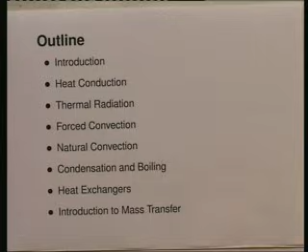And then finally, we will go to the topic of mass transfer and introduce its elements. Now you may ask, why is mass transfer taught alongside heat transfer, when really we are covering heat transfer through most of these lectures? The answer is this: the process of mass transfer has many similarities with the process of heat transfer.

Heat transfer occurs when there is a temperature difference, mass transfer occurs when there is a concentration difference. The equations describing these are very similar or analogous, and therefore when we derive a relation for a particular heat transfer situation, it is often true that relation, with some modification, is also valid for a corresponding analogous mass transfer situation. So the purpose of introducing you to mass transfer is to point out this similarity, so you can use heat transfer relations for studying certain types of mass transfer problems.

As far as books for this subject are concerned, there are a variety of books written and available to cover the syllabus. The two books I am putting in front of you: the first is one which I have written, a textbook on heat transfer, 4th edition, published by Universities Press.

This is a book which we will be following to a large extent, but not all of it, because it goes much beyond the syllabus normally prescribed in the undergraduate curriculum. The other book we will also be referring to is by Incropera and DeWitt, on fundamentals of heat and mass transfer. It is widely used in India and the US, has been used for the last 20 years, and is an excellent book with a lot of practice oriented problems.

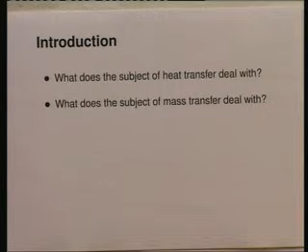Now, let us begin with the introduction. The first thing we ask ourselves is, what does the subject of heat transfer deal with? What is it all about? Why is it important? And then we ask the same question for ourselves about mass transfer. What does the subject of mass transfer deal with? What is it all about? Why is it important? So, let us take up heat transfer first.

Now, first of all, when does heat transfer occur? Whenever there are temperature differences in a body, we know from experience that these temperature differences are reduced in magnitude over time by heat flowing from regions of high temperature to regions of low temperature. The body may be in the solid state, liquid, or gaseous state - it does not matter which. The point is, when there are temperature differences, heat flows from the region of high temperature to the region of low temperature.

The subject dealing with the rate at which this heat flow occurs - I emphasize again, rate - the subject dealing with the rate at which the heat flow process occurs is called heat transfer.

Now, it is important straight away to distinguish the subject of heat transfer from the subject of thermodynamics, which all of you must have studied a little earlier. You must have studied the first law, the second law, certain power cycles and so on. In thermodynamics, normally when we have a system in a certain state and that system undergoes certain heat and work interactions, because of those interactions, the system goes from one equilibrium state to another equilibrium state, attaining a certain state described by temperature, pressure, etc.

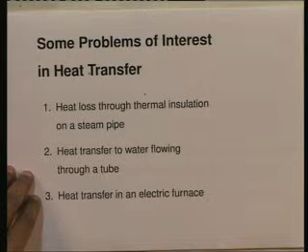I am going to look at three problems. First, I am going to look at a problem of heat loss through thermal insulation on a steam pipe. Then I am going to look at the problem of heat transfer to water flowing through a tube, and then I am going to look at heat transfer in an electric furnace. These are three problems of interest in heat transfer, and we will look at them one by one.

The first one: heat loss through thermal insulation on a steam pipe. Steam is widely used in manufacturing process industries, as you all know. Suppose I have a big plant with a lot of workshops and sheds all over, and steam is needed in each of those sheds. Typically, one may have a central facility where a steam generator is located, steam is generated, and there will be pipelines which carry that steam to the various sheds. Even within the shed, there will be long pipelines along the walls which carry the steam along the length or breadth of that shed, so that it can be delivered at a particular point where it is required.

Now, we have gone to a lot of trouble to generate that steam in a steam generator. We will have burnt oil or something like that, given heat to water and raised that steam at the pressure required. So here in this example, we are talking of steam at 5 bar and 170 centigrade, superheated steam at this condition, and we are passing it through a pipe. Having gone to all the trouble to generate that steam, obviously we do not want that steam to condense or lose heat. So we put insulation around it. Insulation may be in the form of some fibrous insulation like mineral wool, glass wool, etc., which is put round.

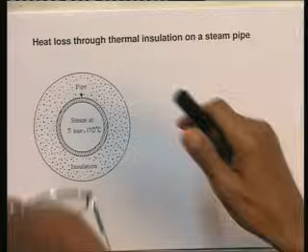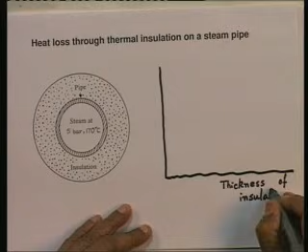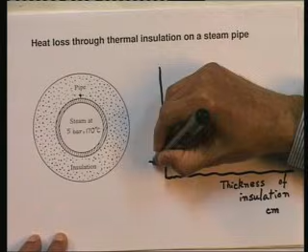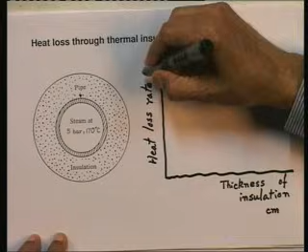Let us draw a graph. On the x axis I have the thickness of insulation which is put around the pipe, let us say in centimeters, and on the y axis I have the heat loss rate, in watts per meter, that is heat loss rate per unit length of the pipe.

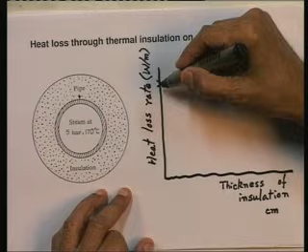Let us say when I have no thickness of insulation on this pipe, the amount of heat being lost is as indicated by the cross here. Obviously, if I put insulation on this pipe, the heat loss rate is going to decrease. Typically I will get a graph something like this, as more and more insulation is put, the heat loss rate in watts per meter will go on decreasing.

Now the problem before the heat transfer engineer, who is to design this and decide what thickness to put, is the following. He is told, restrict the heat loss rate to a particular value, as I am marking here. So find the thickness of insulation to restrict the heat loss rate to the value specified, in which case, having done this calculation and got this graph for a particular insulation that he is using, he will go horizontally, then go vertically and say this is the thickness of insulation needed.

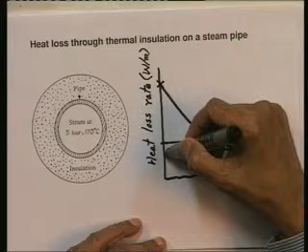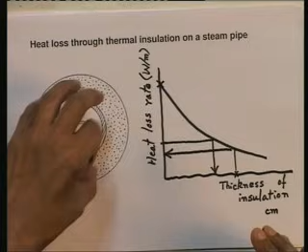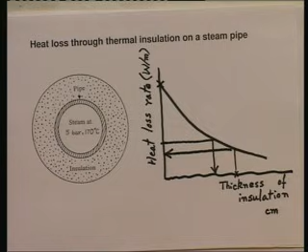Or the problem may be in reverse. He will be told we are going to put 3 centimeters or 5 centimeters thickness of insulation. What will be the heat loss rate as a consequence? In which case, given a certain thickness, he will go up, then draw a horizontal line and say this is the heat loss rate. And therefore, from this point, which is the heat loss rate without insulation, to the heat loss rate because of the insulation, this is the amount of reduction in the heat loss rate. So, because of his knowledge of heat transfer and heat conduction occurring in the insulation, the heat transfer engineer will be able to either decide on the thickness of insulation to put or find the heat loss rate for a given thickness of insulation. This is a typical problem for calculation which we encounter.

Now, let us go to the next problem that I mentioned, that is heat transfer to water flowing through a tube. Here is a tube. The diameter I have given is 2.5 centimeters for this tube. Water is entering it at 30 degrees centigrade. On the outside of this tube, we have low pressure steam at 50 degrees centigrade condensing on the outside of this tube. So obviously heat is going to flow from the outside to the inside, and this water which is flowing through the tube is going to get heated up and go on increasing in temperature as it moves along the length of the tube.

Now, where does this situation occur? This is a situation which will typically occur in a steam condenser. You have a power plant, say. In a power plant, from the turbine exit, you have low pressure steam. You need to condense that steam with the help of cooling water and then raise the pressure of that condensed water, then put it back into the steam generator.

That is the Rankine power cycle. So this tube which I am showing you would actually not be by itself, but would be one tube in a large bundle of tubes on which steam would be condensing. I am showing one as an example. So let us come back to the single tube.

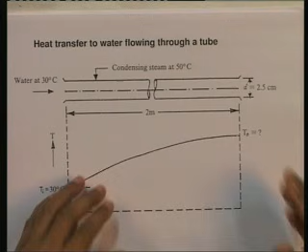So the heat transfer engineer designing for this situation will typically have to tell what would be the length of the tube for a given exit temperature, or the reverse problem: given a length, what would be the exit temperature. Now let us go on to the third problem which I mentioned.

The third problem is heat transfer in an electric furnace. Here we have steel strip which has been rolled in a steel mill, undergoing a heat treatment process. Typically a steel strip would be a few millimeters in thickness, maybe a millimeter thick and a few centimeters wide. It has been rolled by some rolling process and formed into a bundle after that.

During the rolling process, because of the deformation that has taken place, the steel loses certain desirable properties like ductility, malleability, etc. We want it to regain these properties, and typically for that one does some kind of annealing heat treatment process. This consists of heating the steel strip up to a specified temperature, just above that, and then allowing it to cool down slowly. So the job of this furnace is to heat the steel strip up to the temperature required for that heat treatment process to occur, usually around 600-700 centigrade.

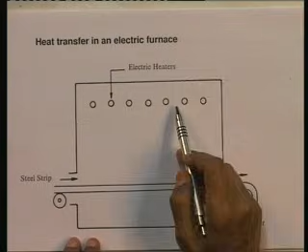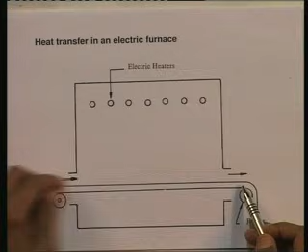So the problem before the heat transfer engineer would be the following: he is told, here is an electric furnace, the temperature in this furnace is say 1200 degrees centigrade or 1000 degrees centigrade. It is required that the temperature of the steel strip at the exit be 720 centigrade or some temperature like that. The steel strip is entering at room temperature, 30 degrees centigrade, and moving with a certain specified velocity. What should be the length of this furnace to get the desired exit temperature?

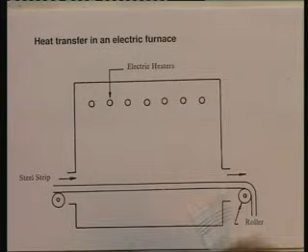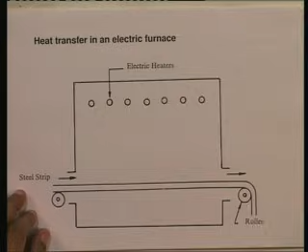Or the reverse problem: given a certain length, what should be the velocity with which the steel strip should move so that the required exit temperature is attained? That exit temperature must be just above the annealing temperature for that particular steel, so that when it goes out it is just above that temperature, then cools down slowly, and during that slow cooling process, it acquires the desirable mechanical properties we are looking for. So this is a typical heat transfer problem an engineer would face.

Now I could go on giving you examples, but I think you get the idea. Let me show you one more example of a problem of current interest. We are in a situation nowadays where electronic circuits, electronics, plays a key part in our lives, and miniaturization in electronics is the key word today. VLSI for instance, or VVLSI, whatever it is. We go on making thousands and hundreds of thousands of transistors over very small areas, compared to the old days when 100 transistors might occupy a whole tabletop.

Now, transistors generate heat, remember that, and it is a requirement that if the transistor is to operate well, its internal temperature must not exceed some safe value. In fact, there are two temperatures. One temperature is a temperature which, if exceeded, will completely stop the transistor from functioning. That should obviously never be attained.

It is known that if a component works at high temperatures, its life, the period for which it will work consistently, reduces. If the design specification requires the transistor to work for a few thousand hours, it will be specified that the surface temperature should never exceed a particular value, typically 50 or 55 centigrade.

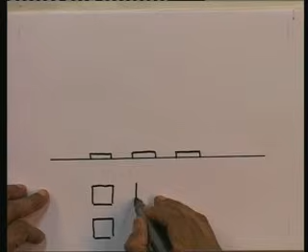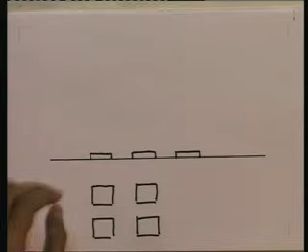Let me draw a situation. This is a board on which we have a number of electronic chips. Let me draw a few as an example: 1, 2, and I am just drawing 3. In a plan view, there may be an array like this. So it could be a rectangular array of chips, typically each about a centimeter by a millimeter high, containing all the electronics we are talking about.

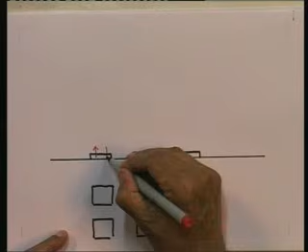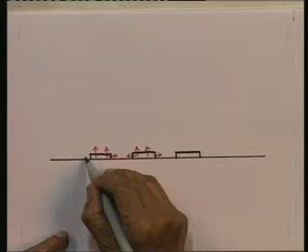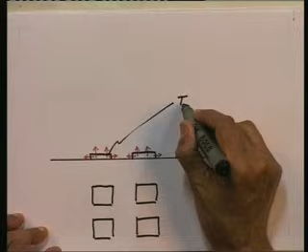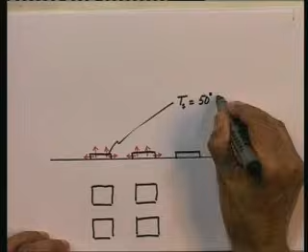The requirement is that heat generated from these chips flows out, shown by the red arrows. The requirement before the heat transfer engineer is that the surface temperature here, Ts or T-wall, should not exceed a value like 50 or 55 degrees centigrade. So the heat flowing out will obviously raise the surface temperature, but that temperature must never go above the specified value.

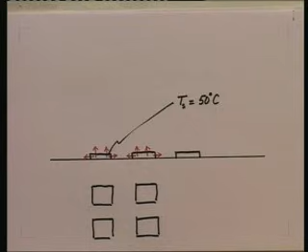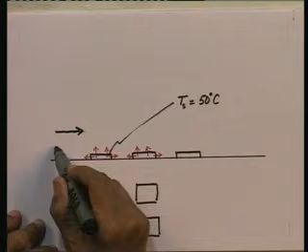So what do we do to hold down the temperature? We may have air blown over these electronic chips, entering at say 30 degrees centigrade, to ensure the surface temperature never exceeds the specified value. Now the problem before the heat transfer engineer is at what velocity this air should be blown so that the surface temperature is not exceeded. That is a typical convective heat transfer problem, requiring equations, data, and analysis of the flow around the electronic chips.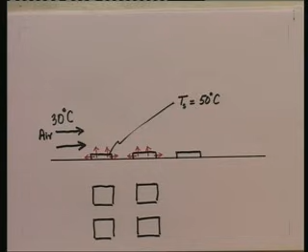So here is another example, the cooling of electronic chips, which will be of interest to us as we go along. Now that we have a feeling for the types of problems we are going to handle, let us discuss the modes of heat transfer.

There are three modes, and all of you must have heard of these, having studied heat in school. The three modes are conduction, convection, and radiation. Let us take them up one by one.

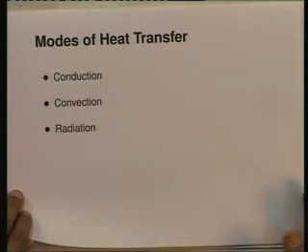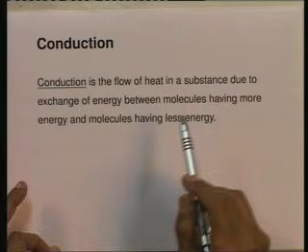Conduction first. Conduction is the flow of heat in a substance due to exchange of energy between molecules having more energy and molecules having less energy. The substance may be a solid, liquid, or gas, it does not matter what the state is. Molecules having more energy are at a higher temperature, molecules having less energy are at a lower temperature. That is conduction, the flow of heat because of this situation.

Now let me draw a sketch to illustrate what we mean by conduction. First, consider a solid structure. A solid typically has molecules or atoms arranged like this, a set of molecules making up the solid, not necessarily in a square array. These solids form a lattice that vibrates, and more vibration means higher temperature.

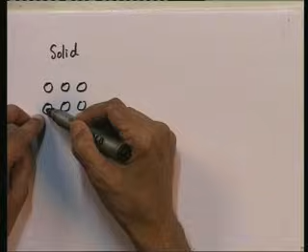When molecules here are at a higher temperature and molecules at some distance away are at lower temperature, the vibrations here will be higher, with more energy associated with these molecules. Because of these vibrations, they interact with the next set, and the next, transferring energy from one molecule to the next. So the transfer of energy by conduction is due to lattice vibrations, which are greater in the higher temperature region than in the lower temperature region. In a solid, one mechanism for energy transfer is lattice vibrations.

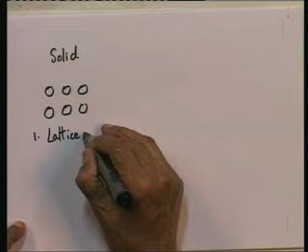Solids, if they are in metallic form, also have free electrons. That is the structure of metallic solids. Free electrons are the basis on which electricity flows in solids; when electricity flows, it is these electrons that are flowing. In the same way, those electrons also carry energy, which is heat transfer by conduction. So the free electrons in a solid, when there is a temperature difference, form the basis for transfer of heat by conduction. This is a second mode by which conduction takes place in a solid if it is a metal. Mind you, not in non-metals, since there are no free electrons there, this is the motion of free electrons.

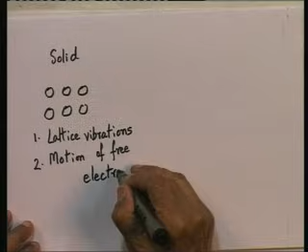These are the two modes: the second for metallic solids, the first for solids in general, non-metallic solids.

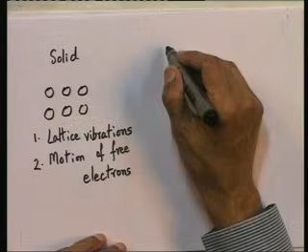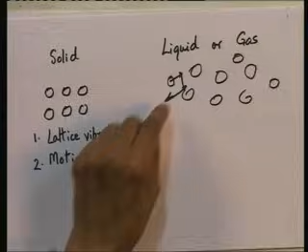Now, unlike a solid, in a liquid or a gas, that is a fluid, molecules have freedom of movement. In a solid, they are restricted to a particular point where they vibrate or something like that. In a liquid or gas, molecules have some freedom. Let us say there is a set of molecules making up a liquid or gas; those molecules have some freedom of moving around in some fashion, and they move over short distances in the liquid or gas in a random fashion.

Now, in an overall sense, in a macroscopic sense, the liquid or gas may be stationary. But in a stationary liquid or gas, there is always this random motion taking place over short distances. In a gas, those distances are a little longer; in a liquid, those distances are a little smaller.

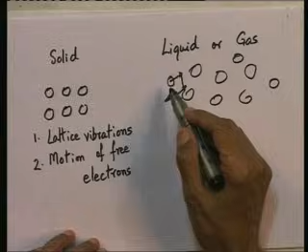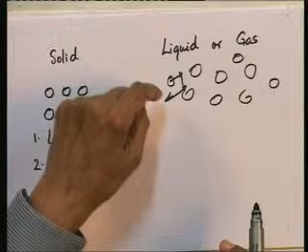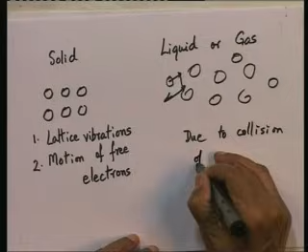Now, the transfer of energy which occurs due to collision between molecules, when they move in this random fashion over short distances within a liquid or a gas, is also what we call conduction in a liquid or a gas. So in a liquid or gas, the transfer of energy occurs due to collision of molecules, molecules at a higher temperature giving their energy to molecules at a lower temperature. But remember, this is the random motion that is taking place; in an overall sense, the liquid or the gas is stationary. So this is how the conduction mode occurs in various substances: solids, liquids and gases.

Now, in convection, which is the next mode, we just mentioned that in a liquid or gas there is this random motion of the molecules taking place. Now, in addition to this random motion, fluids can be made to move on a macroscopic scale, in a liquid or a gas. They can be made to move by forcing them to move. Say I have air in a pipe, I blow that air through the pipe, so I can make the air move by forcing it, or I can make the air move because of creating temperature differences. Temperature difference causes a density difference, which causes a movement of the air. So fluids can be made to move in a macroscopic sense, whether in the liquid or the gaseous state.

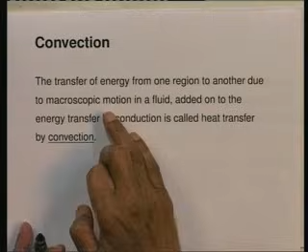The transfer of energy from one region to another due to macroscopic motion in a fluid, added on to the energy transfer by conduction described earlier, is called heat transfer by convection. That is the meaning of convection. We already have conduction taking place if we have temperature differences. In addition, if there is a certain movement in that liquid or gas, caused by a temperature difference or forced by some macroscopic motion, then energy is being moved from one point to another because of the movement of molecules. So the transfer of energy due to this macroscopic motion, added on to the energy transfer by conduction occurring because of random motion, the sum of the two together is what we call heat transfer by convection.

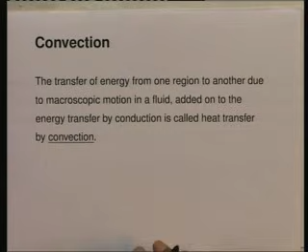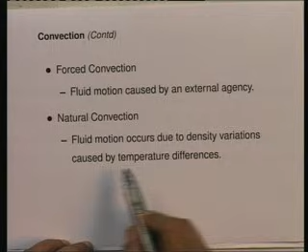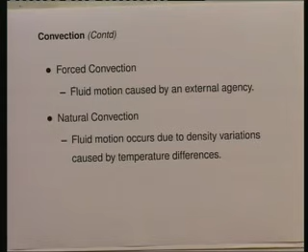If I force the flow to move in a particular manner, then it is called forced convection, that is, the fluid motion is caused by an external agency. On the other hand, if the fluid motion occurs due to density variations caused by temperature differences, then that is called natural convection. So convection is of two types: forced convection, when the fluid motion is caused by an external agency, and natural convection, when the fluid motion occurs due to density variations caused by temperature differences. Now the third mode is radiation.

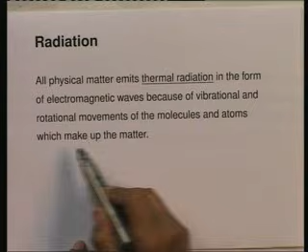Which is quite different, and let me read out the definition. All physical matter emits thermal radiation in the form of electromagnetic waves because of vibrational and rotational movements of the molecules and atoms which make up the matter. This is known from physics. The matter may be in any state - it could be a solid, liquid, gas, or plasma. It does not matter what it is. If it is at a certain temperature level, whatever that level, it emits radiation in the form of electromagnetic waves, because of the vibrational and rotational movements of the molecules and atoms which make up that matter in solid, liquid or gaseous state. This is known.

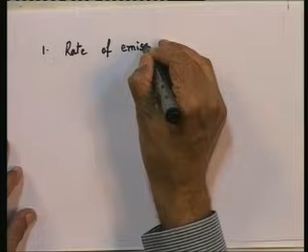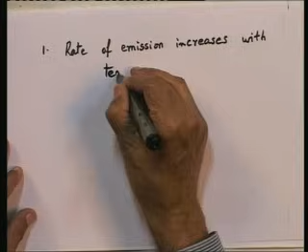What are the characteristics of the radiation? Number 1, the rate of emission increases with temperature level. The higher the temperature, the more the radiation emission by thermal radiation. That is one characteristic to note.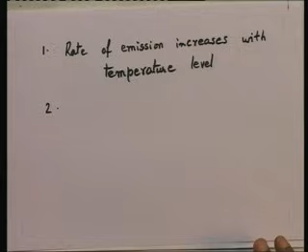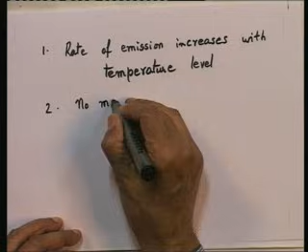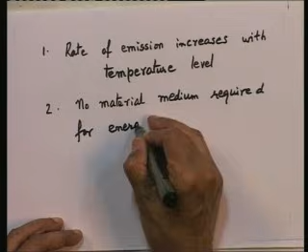A second characteristic to note is that we do not require any material medium for the energy transfer to occur. It is in the form of electromagnetic waves. Electromagnetic waves can go through a vacuum - they do not need any material medium like air, gas or liquid for transfer of energy. So these are two characteristics to note: radiation, the thermal radiation in the form of electromagnetic waves, does not require any material medium for its transfer.

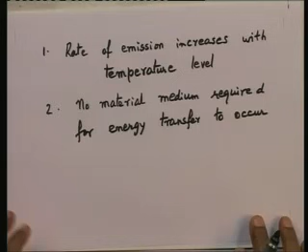So now we have discussed the three modes of heat transfer: conduction, convection and radiation. If you go back to the problems we described earlier, you will recognize that the first problem, thermal insulation around a pipe, is primarily a problem of heat conduction. The second problem, flow of water in a tube, is primarily a problem of heat transfer by convection, and that too forced convection. And the third problem of annealing steel strip is primarily a problem of radiative heat transfer. So these were three problems, each of these three modes - the first of conduction, second forced convection, and the third thermal radiation.

But I do not want you to get the impression that this is so always. In general, problems in heat transfer are not amenable to this kind of separation. Very often, more often than not, the situation one faces is one in which all the modes of heat transfer occur together, and one must be able to tackle the problem by understanding these modes and analyzing them together. So I do not want to give the impression that situations always occur in which one can separate and say this is the mode or that is the mode. There are very often situations in which all the modes occur simultaneously, and one needs to take account of them. Now I am going to give an example of a situation in which all these modes are occurring.

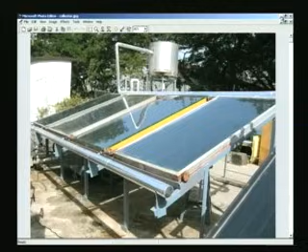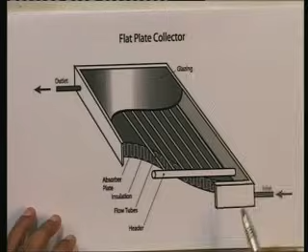Now let us look at one such solar collector. There are 4 in the picture, and I am going to now look at one, so that we see the inside of it, what it looks like. This collector is 2 meters in length, 1 meter in width. Typically on top there is a glass cover, which you had seen in the picture, and below that there is an absorber plate. This is the absorber plate, a thin copper sheet, a millimeter or so in thickness.

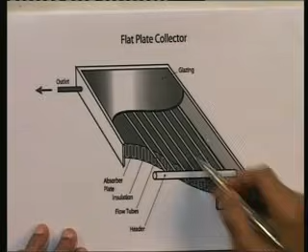On that absorber plate, or on the back side of it, a number of flow tubes are soldered, and the water which is to be heated flows in these tubes. So it enters here at the point called the inlet, flows in this header which I am pointing out here, then gets distributed in these flow tubes, and then goes out through the outlet header. Right, that is the position.

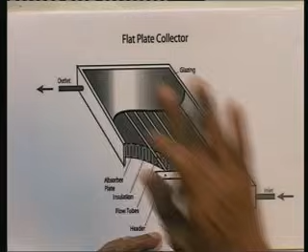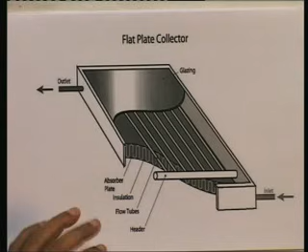So the solar energy falls on the flat plate collector, and the water as it flows through gets heated up, and typically, as I said, you can get hot water at temperatures like 60, 70, 80 degrees centigrade in this collector. Now let us look at a cross section of this collector. What would it look like?

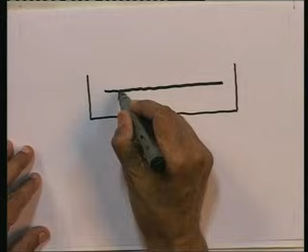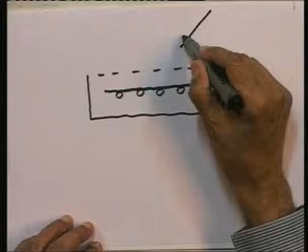A cross section of this collector would look like this. This is the casing of the collector, this is the absorber tube, the absorber plate, these are absorber tubes below it, and this is the glazing, the glass cover on top. This is how a cross section would look. Solar energy falls on this solar flat plate collector and heats up the water which is flowing through these tubes.

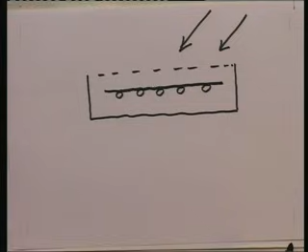Now today we will stop here, but next time I will look at the different modes of heat transfer that are occurring in this device. So we will take off from this point in the next lecture.

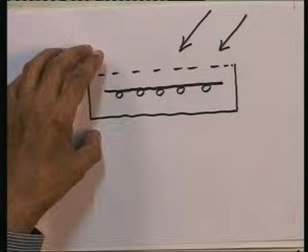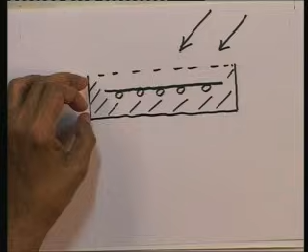We have described a solar flat plate collector. You know what are the components that make it up: an absorber plate, tubes, a glass cover on top, and on the back side there is insulation to prevent heat loss to the sides and the bottom. These are the components that make up the flat plate collector. Next time, in the next lecture, we will look at the different modes of heat transfer that occur within this device and write down a simple energy balance equation for it.

So today we are going to stop here, but let me recapitulate for you what we have done today, so that we get a feel again for what we have achieved. First of all, I have outlined the subject that we are going to cover in 30 lectures, given an outline of the different topics. Secondly, I have talked about what the subject is all about, the subject of heat transfer and the subject of mass transfer. Then I described for you a number of problems of interest in heat transfer.

Then I took up the different modes of heat transfer: conduction, convection and radiation. And towards the end, I started talking about the example of a solar flat plate collector to illustrate how different modes of heat transfer exist within a particular device. We have not completed that, we will be taking it up, continuing that next time. So today we will stop at this stage. Thank you.